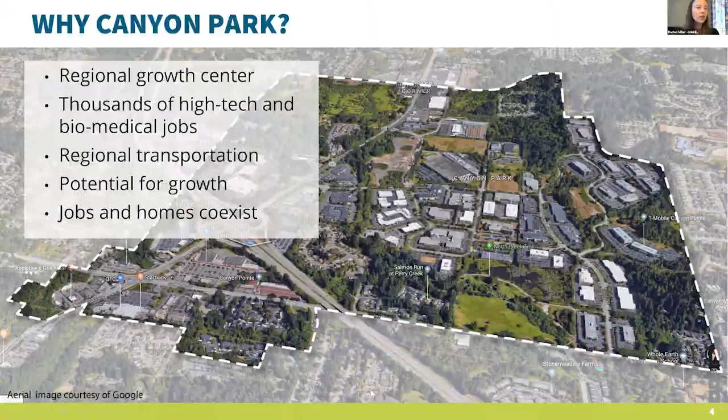So what's the challenge? We really want to ensure that growth makes Canyon Park better. There are regional assets, like I mentioned before. There's I-405, the Bothell-Everett Highway. There's a park and ride in the area and wetlands. And these are all really great resources. But when they come together and meet here, and the wetlands taking up a lot of space, and though they serve important functions, it makes a complicated and constrained area, particularly for transportation.

And no matter what level of growth we expect or plan for, it does get worse. And to address the transportation issues, we do need substantial funds. So as I mentioned before, the Regional Growth Center criteria, maintaining that designation allows us to compete for regional transportation funding. And we need to show how we can address these challenges and how we can grow feasibly with that.

There are also changing times. People are looking for more amenities in these multifaceted neighborhoods, and that idea of mixing of uses and shifting from single occupancy vehicles or regular cars to other modes like biking and walking and shuttles and first and last mile options. So the whole purpose of this sub-area plan is to plan so that we can make things better than we otherwise would without a good solid plan in place.

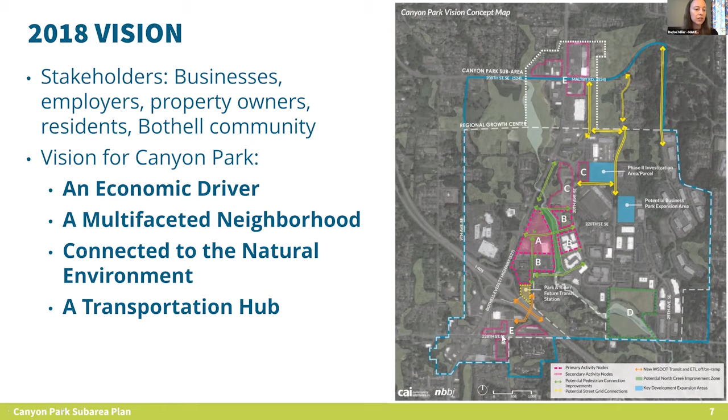So we've done a lot of talking with people, Bothell staff in particular, over the last 3 years. Lots of stakeholders involved. And back in the 2018 vision, the idea or big qualities of this area were to become an economic driver, which it already is, so enhancing that, a multifaceted neighborhood connected to the natural environment, and a transportation hub. I mentioned that we've talked with a lot of people. There are a zillion meetings we've had with community members about the 9th Ave community, 20th Ave, technical advisory groups, the life sciences, the Planning Commission.

And so this is just a quick summary of some of the major points we've heard from all of those folks. In terms of the concept and land use and urban design, we've heard that focusing the growth near transit is really important to people, and recognizing that there is a shift towards transit. This is Bothell's big chance to do that here.

Mixing residences and jobs has been supported in most of the meetings we've been involved in. The green highlights mean it's coming from more outside groups than Planning Commission, often in addition to Planning Commission. The idea of putting residential near North Creek to make use of that as an amenity, and including parks and open space in the planning.

Meeting Puget Sound Regional Council Regional Growth Center criteria is important, and addressing the school capacity, or at least understanding the issues there and how the buses are flowing. And as I mentioned earlier, considering parks.

In terms of economic development, lots of support for this being a life sciences cluster. There are a lot of biomedical companies here, and they've become even more important during the COVID pandemic. And supporting small and people of color owned businesses.

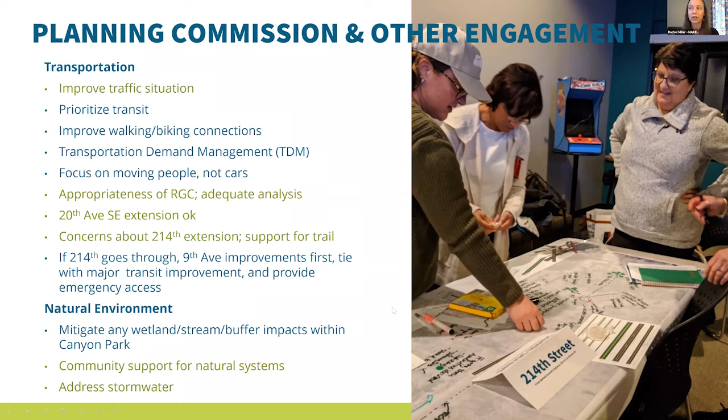Okay, so for the overall concept, there are two major transportation corridors, the I-405 corridor and the Bothell-Everett Highway. So just for a little orientation, this north-south route is the Bothell-Everett Highway, then we have I-405, 228th on the south end, and Maltby Road, or SR-524, on the north end.

What we see as the big opportunities, and what we've been hearing, is that transit is a major regional investment, and making use of that and building out neighborhoods that make use of that and act as really self-sufficient, multifunctional. You can live, you can work, you can play, you can walk around on a trail, all of these things within walking distance, biking distance, or rolling distance, however you get around, ideally without a car, or lessening the need for car trips or shortening those trips.

So the major areas where we see opportunities are this 17th node north of I-405, connecting from the transit station up 17th and eastwards across North Creek into the business park.

And then the other major node is the Canyon Park Place node south of I-405. Again, connecting from the station down into the current shopping center and then to the neighborhoods, which are more extensive south of the sub area.

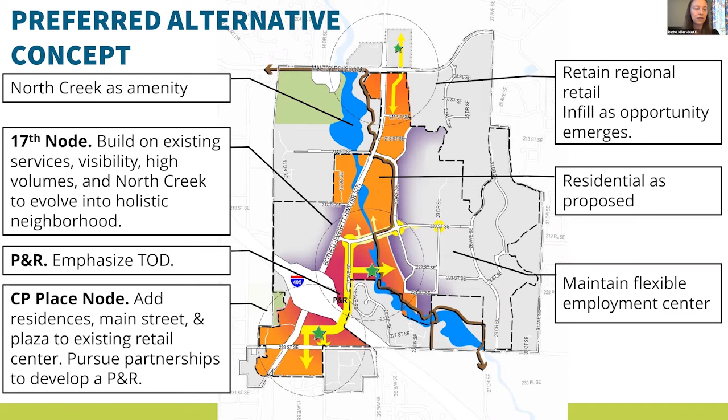These purple areas further out are serving an important function for the city right now with the life sciences cluster and other affordable commercial space and really interesting businesses out here. So maintaining them and maintaining the flexibility to keep those uses and let them grow as they best see fit is really important to this plan.

So just imagining what those neighborhood centers might look like, something like this street where anybody can feel safe and comfortable walking to and from a station area to their job or to their home.

And then that connection to the transit station, it would be up on I-405. There's a WashDOT project to connect 17th up and provide express toll lane access. So making sure that if this park and ride could redevelop with better uses at the ground floor, to help people feel really safe as they walk by and make the connection upwards, up to this flyover station and then over a ped bridge, making it as safe and wonderful and comfortable as possible.

And then the same thing on the south side. This is a very long-term WashDOT plan, so nothing that's going to happen in the near future. And I should mention this whole plan is a 20-year plan, so everything we're talking about is a slow evolution, nothing that's going to happen today or tomorrow.

But again, with this redevelopment, connecting to a new neighborhood center that slowly evolves over time, but connecting with a nice, wonderful, activated path that gets you up to the station area.

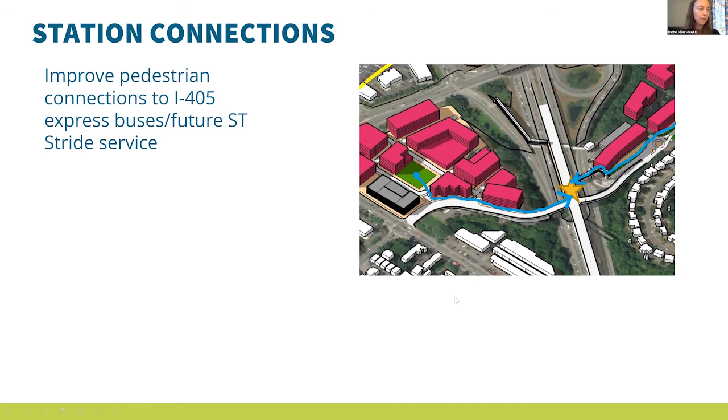So the land use vision is hitting all the right marks. It's got the mix of uses so that people are able to reach their jobs and their homes pretty easily with this set of land use mixes, and with intensities closest to the stations. So where you see the dark pink, there's more intense uses close to the stations, and as you get further out, less intense uses. This mix and intensity has also met the regional growth center criteria for a certain level of density.

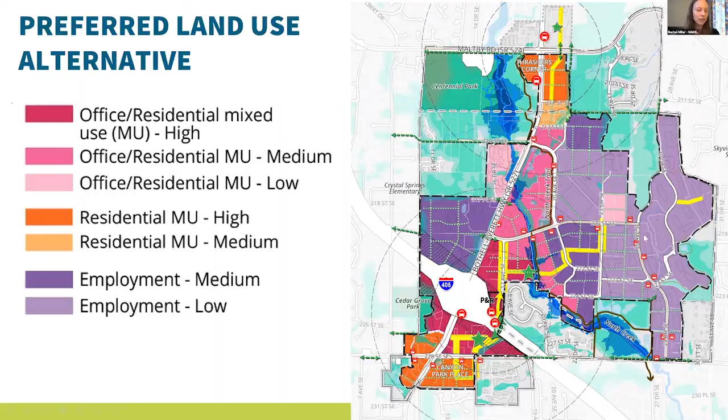Just to give a sense of what these buildings look like, or what intensity we're talking about, it's about six or seven stories in the more intense pink areas closest to the station. Moving further out, in the half-mile area, which is important because the quarter-mile area is about a 5-minute walk, which people will likely walk for transit. For good, frequent, high-capacity transit, a 10-minute walk is okay. So in that middle pink area, around 5 stories or maybe 4, and in the lighter pink areas, we get lower intensities.

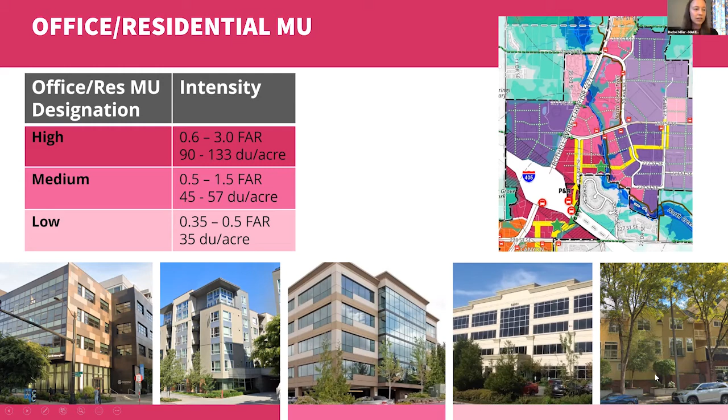Moving further out, away from the transit areas, these are areas we see as more residential in nature, connecting to the surrounding neighborhoods, south and north, outside the sub area. So again, higher intensities closer to transit, and lower intensities like townhouses and a mix of small apartments in the lighter orange areas.

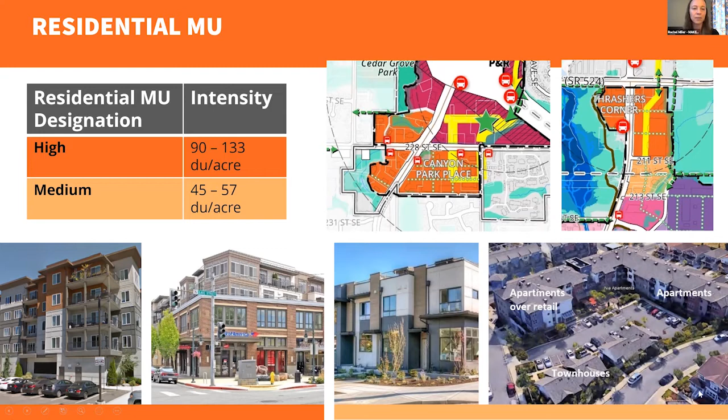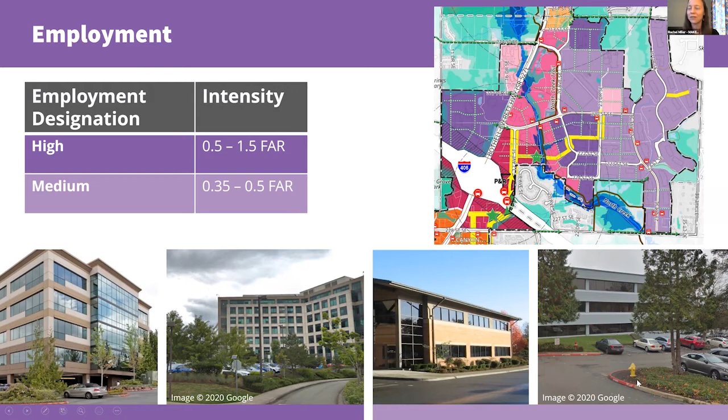So a little overview on transportation. There are no easy solutions. I think we opened by saying this is a challenging area, and it really is. So the plan is recommending as much as it can for improving roadway capacity, by doing some intersection improvements and improving roads as possible and as economically feasible.

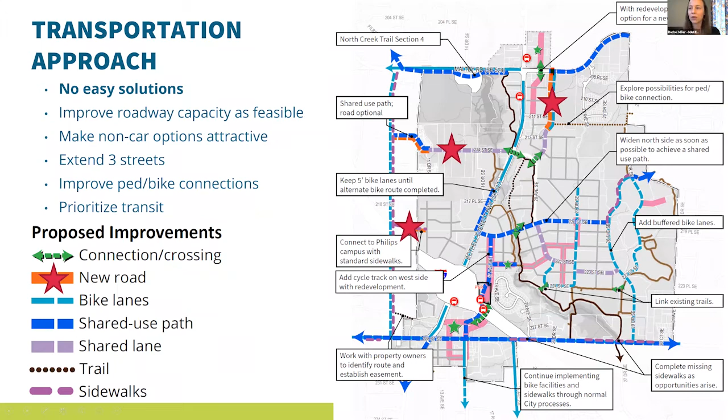And again, just prioritizing transit as much as possible. On that last slide, there were also a lot of pedestrian and bicycle connections, which were an important aspect of the plan. So what's really interesting about the mix of uses is the comparison to the no-action scenario.

If you just take the plans that are on the books right now and carry that forward, doing the comprehensive plan projects already planned along with the regional growth that's already going to happen, as mentioned earlier, it's not a good picture.

The Bothell-Everett Highway is red and has a level of service F, meaning slower, stop-and-go traffic. Moving up the scale, traffic flows are a little better. With our 2043 preferred alternative, we get to a level of service E. That includes pretty aggressive transportation demand management strategies, meaning working with business owners and employees in the area to see how they can reduce commutes in and out.

And then there are the capital improvement projects beyond the comprehensive plan — the projects this plan came up with: the 20th Ave extension, 214th, 219th, and a handful of other intersection and capacity improvements not included in the comprehensive plan.

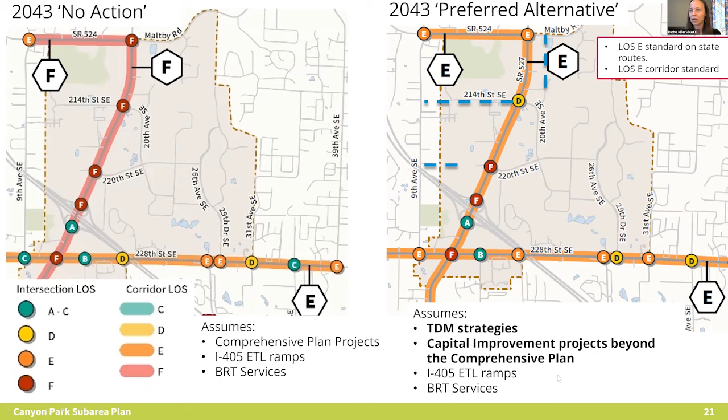So a lot of people have been interested in this 214th Street extension. It's not an easy extension to make by any means. We expect that about 800 trips will be taking 214th if it punches through, about 400 going north and about 400 going south. These numbers are just approximations, but it might average about 27 vehicles per minute in the peak hour, increasing to 33 vehicles per minute if 214th goes through by 2043.

One of the things we've heard from community members is that it's really important that 9th Ave be treated with sidewalks the entire length and good quality bicycle facilities, and that really needs to happen first before additional trips come into the area.

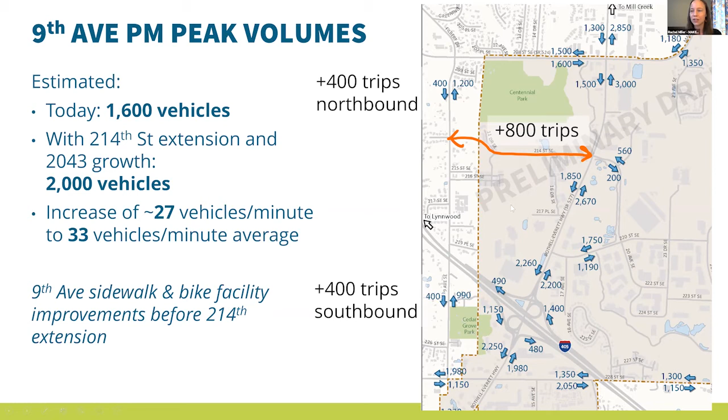So we're at the time where we can break into small group discussions, and the big thing we want to hear from you is: what did we miss? How could we improve the draft plan? What actions are most important? We have 3 groups here, and this is also your chance to dig in a little deeper and talk more about the proposals in the plan. The first group is concept and urban design, then land use, economic development, and natural environment, and then transportation.